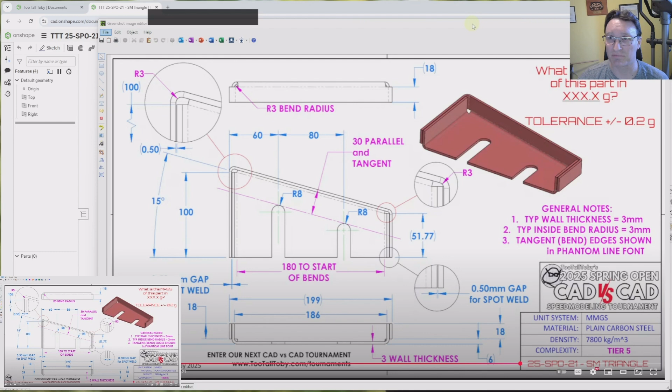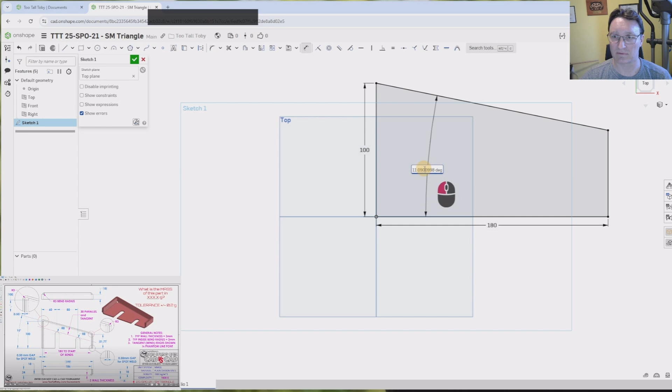So the first way is pretty standard. You'd start with the top shape, then do this. This is 180, and we've got an angle of 15 degrees. Got a new mouse, I'm not used to it yet.

That's all you need for this sketch. Then you create a sheet metal model with a thicken, making sure we've got 3 millimeters and the bend radius of 3 millimeters, and I want to make sure I go up, which is good.

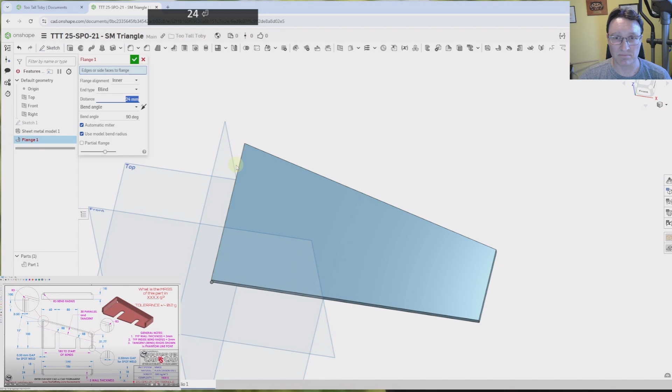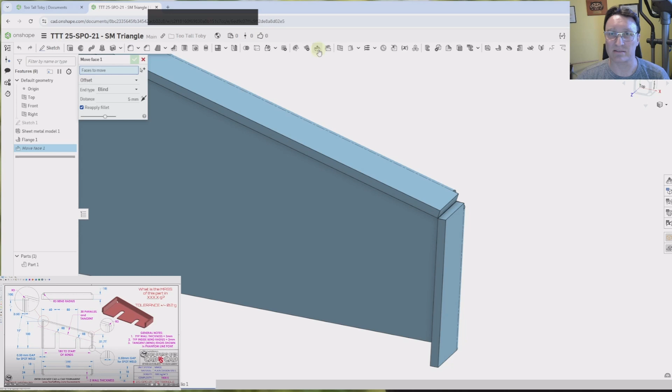Obviously the corners are not what we want, but we're going to use move face, which is really a very powerful and integral part of the Onshape sheet metal toolbox.

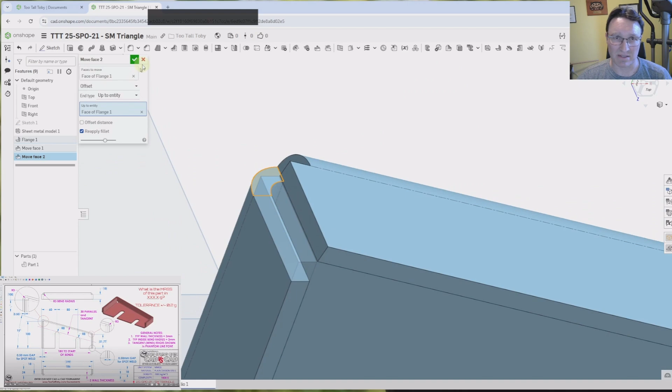So here you have to do it twice because the angle isn't the same, so the distance that you have to move them by is different. Otherwise you could get away with just doing one.

Now the next part is to create those flanges, but if you try to create a flange directly from here, it will interfere, so it won't work. So again, we can use move face to give ourselves some room, just some arbitrary distance. This doesn't actually matter. And here we can do both.

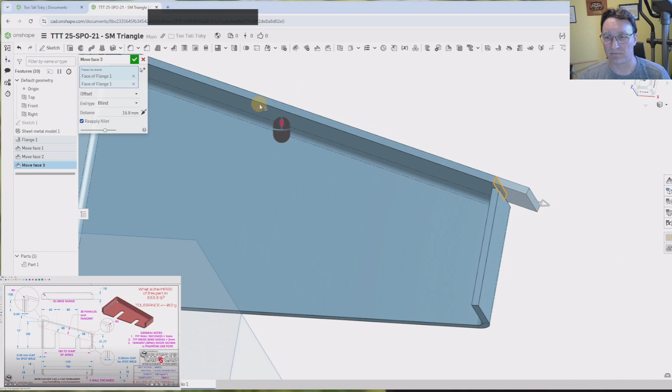And now we can get our other flanges done, which would be this one. So there's a couple of things you want to do here. Instead of bend angle, you want align to geometry so that you can pick that face, and that's going to make sure it's parallel.

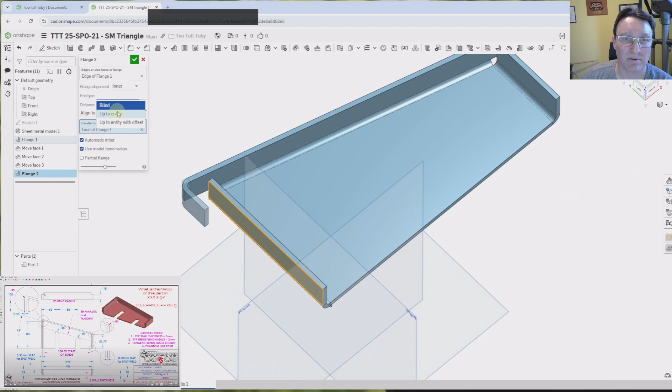And for the end type, up to entity, so that's the right length. And the way Onshape does this, you can actually do both at the same time, and they will both have the correct end condition and the correct direction, even though the bend angle and length are different, which is kind of neat. And then, you probably guessed it, but we're going to do move face again.

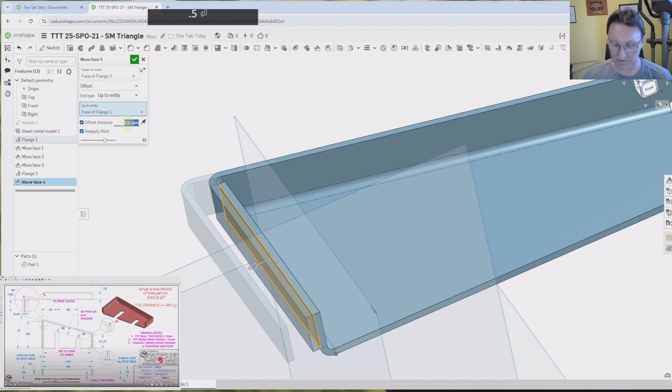I'm going to move this face up to here with our offset of 0.5 millimeters. Repeat at the other end, up to offset 0.5, and that's it for this.

Then we just need to do the slots. So we've got, let's see, this one, I guess we don't know the height. I'm gonna make this parallel to this, and then this. Let's see, you got a couple dimensions.

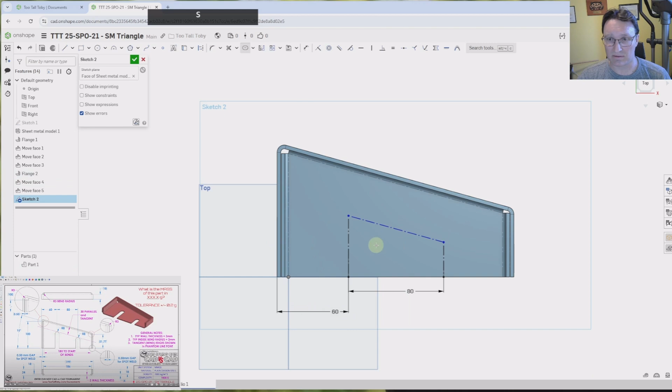This would be that's the 80 to 60, and then our 2 slots, which are going to be 16, and then we just need a dimension between here and here of 30. And because I made this parallel to this edge, the same as, I don't need to actually make them tangent, just use the dimension.

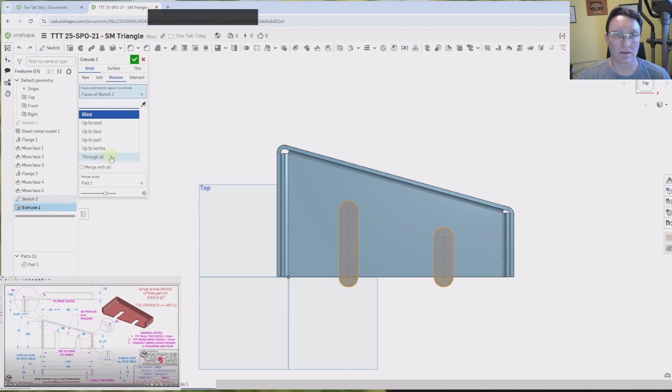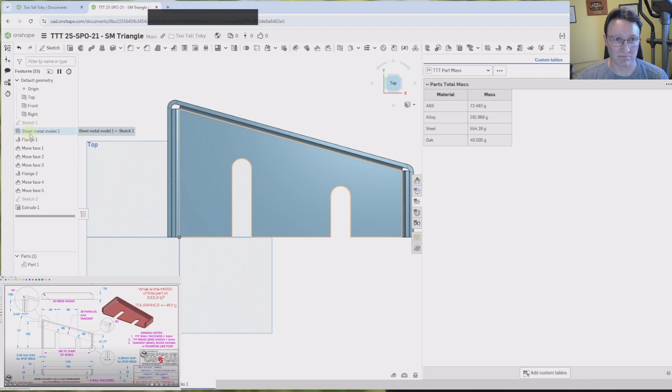And that's basically it. I guess we can check our mass. 554, I think that was it. Should double check, I'll have to check that because I'm not actually sure. But regardless, this is the idea of how you can do this, and it's basically just using sheet metal features and move face features to get all of that.

So next is the 3 feature option, which is going to be interesting. So I'm going to start a new part studio.

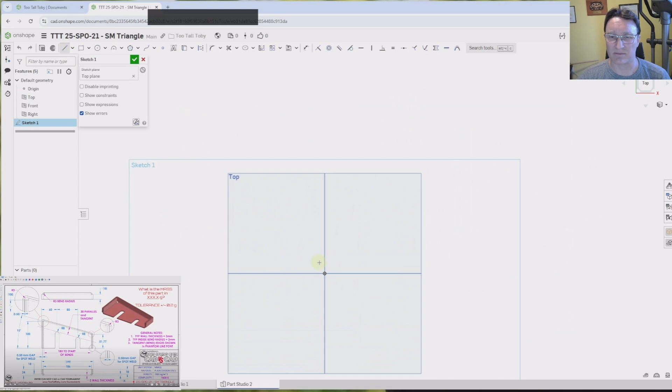And actually, I might need 4 features, really, if I'm being honest. Let me not get too distracted if I'm thinking too many things at the same time. So we start the same way.

Make that 15. But we're going to do the other preferred way of dealing with sheet metal in Onshape, which is by converting a solid. So I'm actually going to create the shape of the outline, and in this case this part beyond the given 180 is going to be 1 thickness plus 1 bend radius, which is 6.

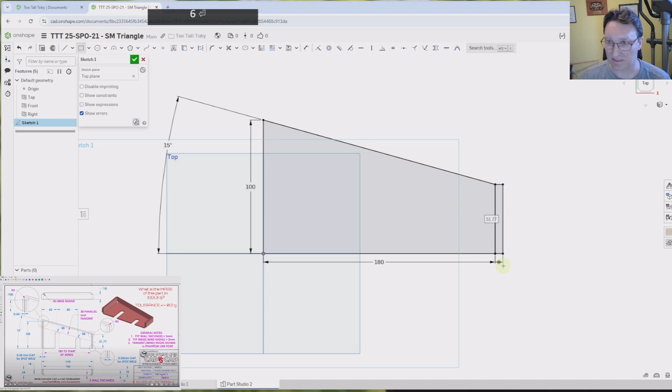So we're going to do that here, do that here, make sure this is 6, and then we're going to use an aligned rectangle to do the same thing. And here we go. So we could do that, but we can actually do one more thing.

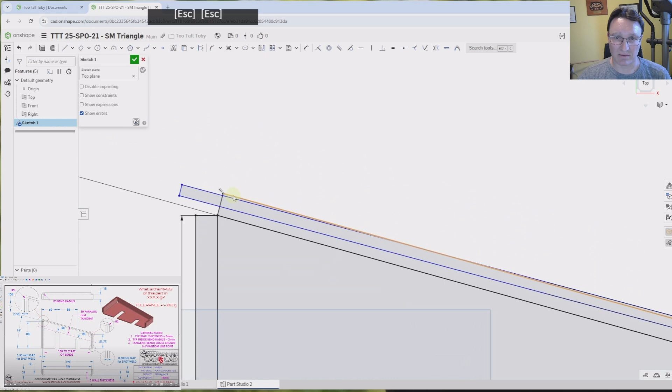Like this. And this time we're only going to make this 3. And I am going to make this and this coincident. And now the fun part, can make this 0.5, which is the offset we want for our flanges. And same here, 0.5. And now I guess the...

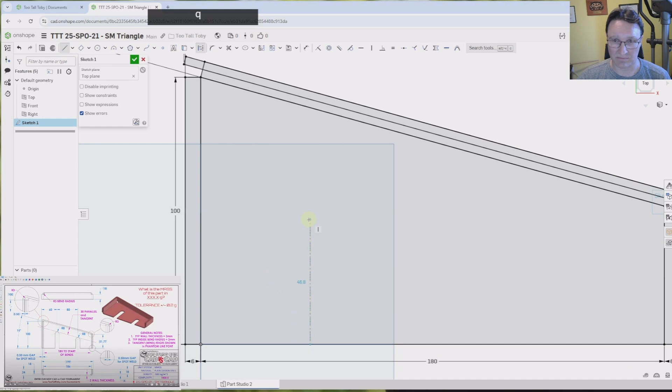part where you can do it all in one feature is I'm gonna put the slots in here like before. Put this at 80. And now I have to be careful here because the 60 is really the outer flange, so I need plus 1 thickness plus 0.5. So really I want 60 plus 3.5.

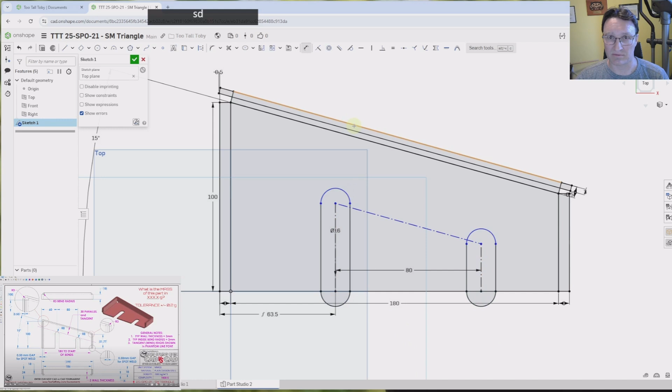So it's 3.5. There we go. So that requires a little bit of math. 16, and then we want our dimension. We do have our external face directly here, so that should be good.

So now we're going to do a regular extrude for this one at 24, but we're going to exclude these regions. So this is our base shape.

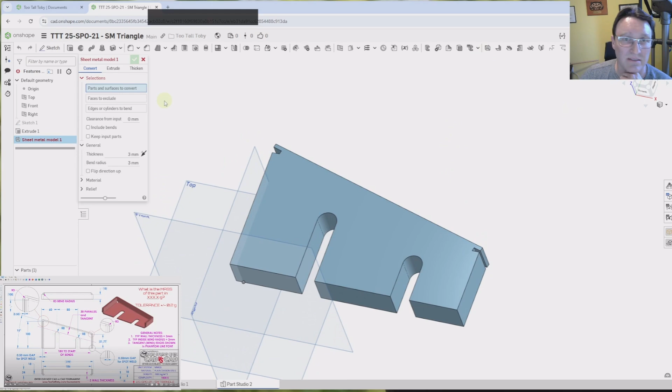It looks a little bit weird, but now if we do a thicken, we can pick this, this, this, and this, pick our bends, and we also have to reverse the thickness. Now we've got this fairly good looking thing already.

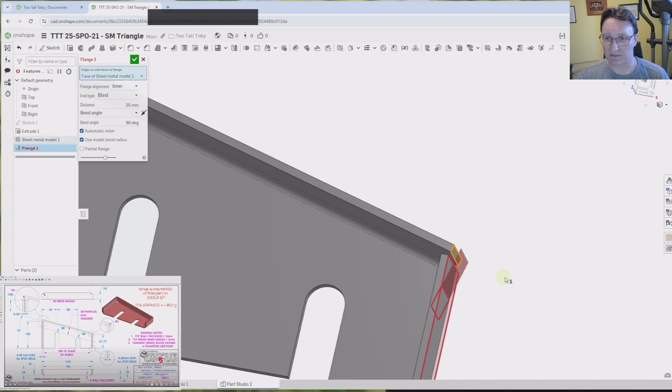And now we can do our flange, which is going to be, again, the same thing, but we're going to keep inner this time. We're going to go up to here. Oh, sorry, keep doing that. Up to here. And then for the angle, we're going to do align to geometry again. And you can see this looks pretty good.

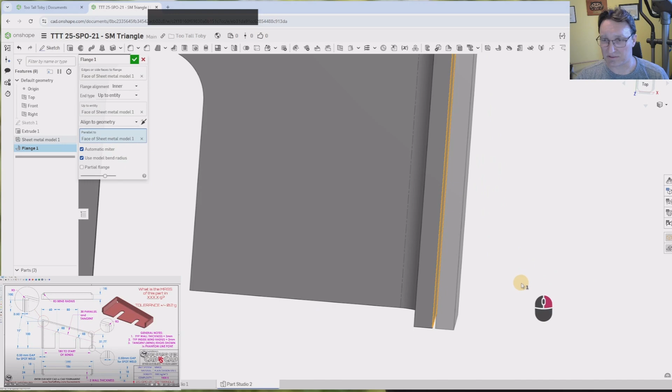And again, Onshape is actually pretty smart. You can grab both in one go. And this is basically it. Double check that we've got 0.5 and 0.5.

And for the mass, oh yeah, I guess I do need to delete that part because this mass table looks for everything at the same time. And here we've got 555.7.

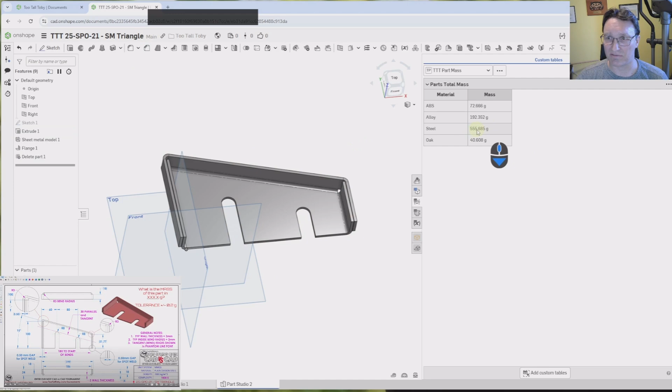Okay, so we might be a little bit off here. But okay, so I need to double check that. But anyway, I don't want to distract too much. The key point was that one sketch and 3 features can create this correct shape in Onshape, which is pretty cool. Anyway, it's a little bit of troubleshooting.

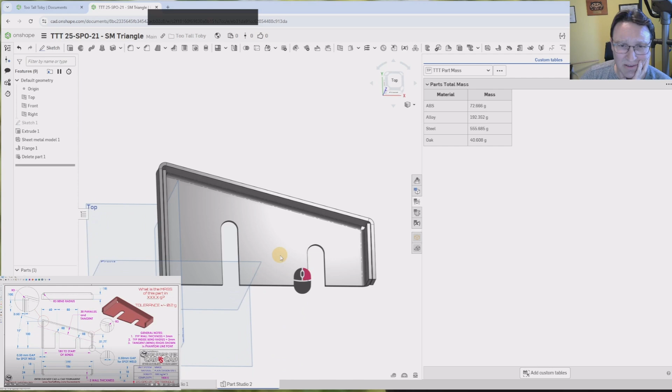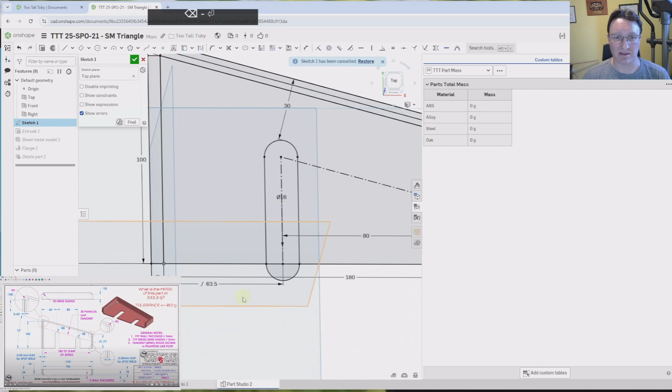Okay, I did find the issue by measuring between here and here. I don't have my 60, and the mistake here is that I did 63.5, but really it's 60 minus 3.5 because I want 60 from the outer face here, which is going to be 1 thickness plus 0.5. So this was the problem, and I get 554.3, which is correct.